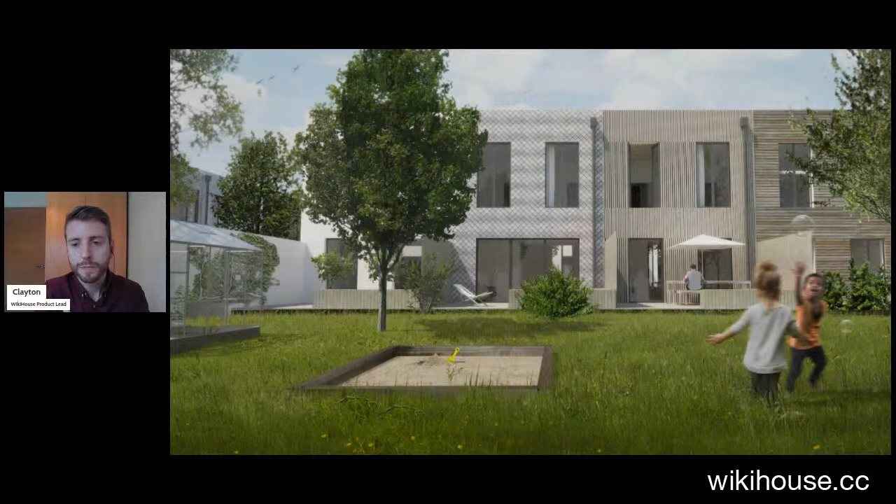If you've come to this through WikiHouse, you already know the context well - it's a construction system. That's one of the projects we do, working on how to make zero carbon construction more accessible and easier to do.

Some of the other projects we're dealing with look at design and procurement systems. This is part of the project we call BuildX, which looks at how to make design itself more accessible to people. The whole process from concept to finished building is really opaque for most people who aren't construction professionals, so we're trying to smooth that process and make it easier to understand using digital tools.

Then we're looking at the planning system, working with local councils to digitize their planning regulations and build interfaces for both planners writing the policies and end users who want to build something and need to know what they can build, what permissions they're allowed, and how to go through the process of applying for those permissions. That's ongoing and being tested with numerous councils.

One of the things we've started to get more interested in - though we've actually been doing this for years - is formalizing work on the property system through a project called Fairhold, which I'll touch on in this presentation.

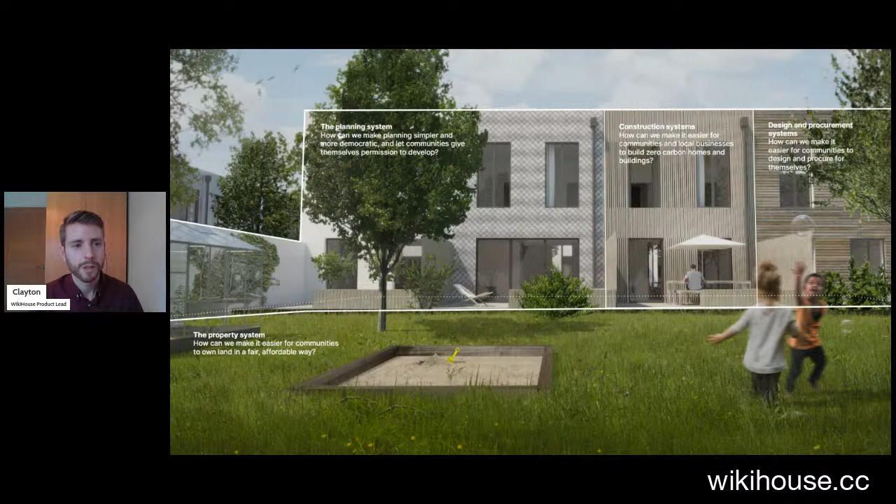I'm going to dive into the big picture here, which is the overarching question we all want to know: how exactly are we going to achieve zero carbon? It's talked about, but is there a plan? How are we going to get there? What needs to be done? For this talk, I'm going to focus on the context of the UK. Obviously this is a global issue and we all share the same atmosphere, so we need a global effort, but the UK is the case study we're most familiar with, and also one of the high carbon emitters per capita.

The big issues that come from this - of course we know the face of climate change and the climate emergency and the urgency of what we need to do - we also understand that behind all this, the problem is the systems we build our economy, lifestyle, and everything on, which are baking in these emissions and this trajectory. The only way we're going to change that is by looking at the models. I think one of the things I quite like about this is that there are a lot of invisible systems that we just take for granted.

At the same time, there's a lot that can be done in terms of the base level of understanding and accessibility to new technologies and new solutions, and the knowledge around that. One of the things that is changing is this push towards electrification of housing, and some policy is helping in this space.

The outlawing of gas boilers will push us more towards electrical heat pumps and MVHR ventilation systems, where you've got buildings built to a high level of air tightness. In terms of indoor air quality, comfort, and heat saving, heat pumps and MVHR make a lot of sense.

We're already seeing a large uptake in rooftop solar for domestic buildings, and hopefully that will increase. It also means switching appliances—anything burning fossil fuels, like gas stovetops, can be replaced with electrical systems like induction hobs, coupled with energy efficiency methods for the building fabric. This will make a big difference to operational carbon.

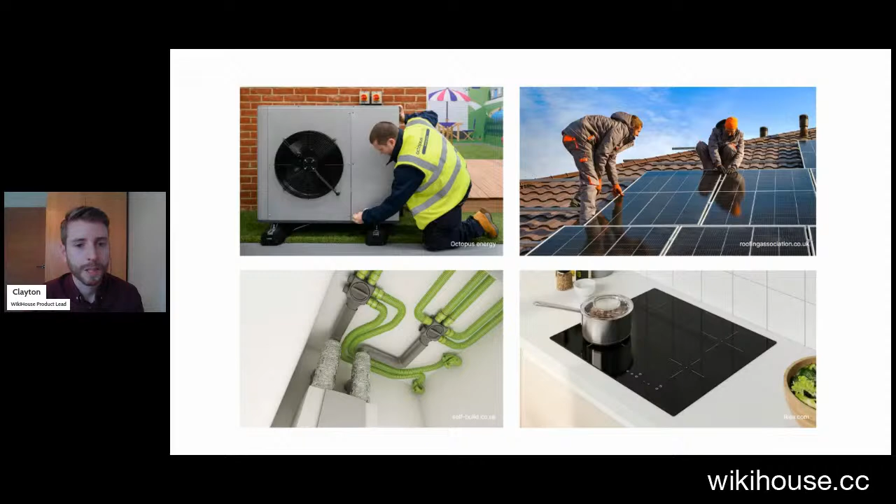This is one particular project worth taking a look at, which Dark Matter Labs and Civic Square collaborated on. It's about not just looking at retrofit in terms of the performance of the building itself in isolation, but looking at it as a neighborhood—both the retrofit of buildings, but also the public spaces, amenities, transportation, and livability for that neighborhood. So it goes deep on retrofit, and is definitely worth following in more detail.

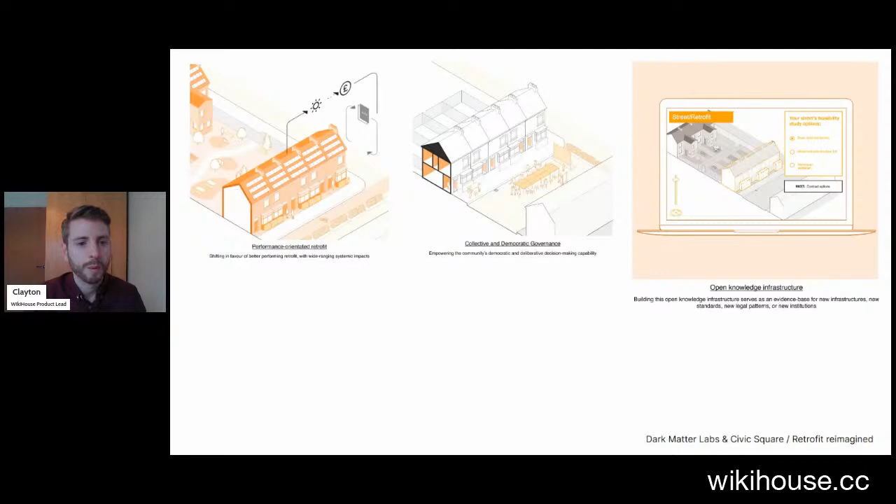Something else we're doing a lot of work on is new buildings. This is where we've come to with WikiHouse—we have a social obligation to build more housing. We can't just stop, and that's not just because of an increasing population, but because there's still a large unmet housing need in the UK, and an urgency to get people out of emergency accommodation into a home of their own, some stability.

Even the houses going up today or yesterday are going to have to be retrofitted 10, 20 years down the line, because they're just not going to meet the performance levels we're talking about, or they're going to be really costly to run. We're still continuing business as usual, at least in the mainstream, and there's a lot that has to change in the space.

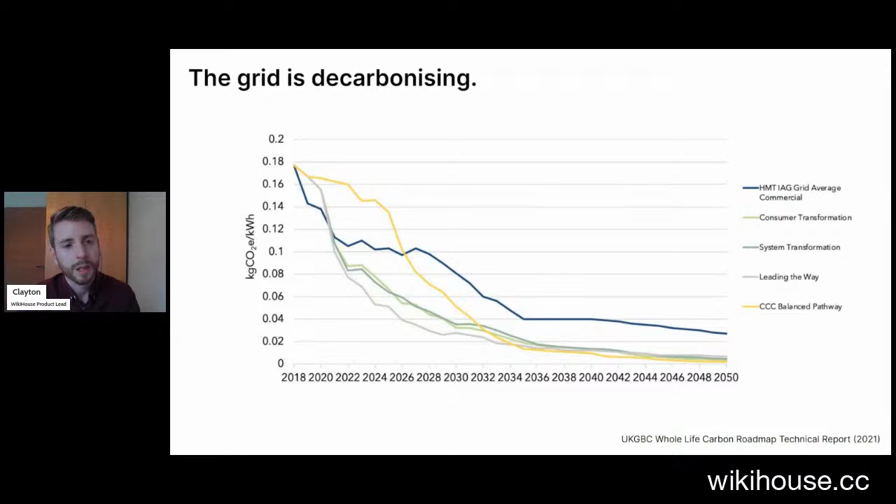That's both encouraging, but also it's a challenge for embodied emissions. And the way we currently build our homes, we in the UK have a large proportion which is focused on masonry and cementitious construction.

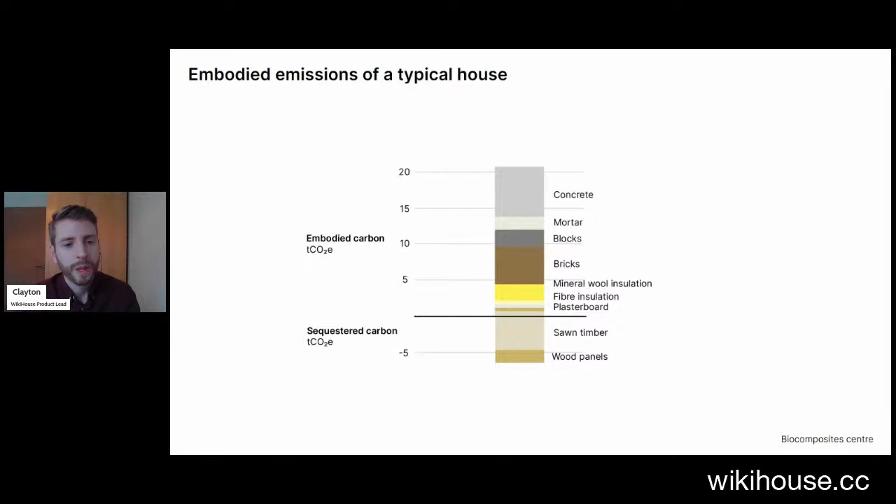So we've got a lot of concrete, mortar and brickwork in terms of the material profile, and very little that can be renewably grown, or that's biomass in terms of wood and timber. We need to flip that entirely, switching from carbon-emitting legacy masonry construction to something bio-based, renewable, and actually a carbon capture technology, provided you don't just burn it at the end of its life.

We've got this huge opportunity to use the materials that we need for construction of these homes to meet the critical housing need that we have as a carbon sink. We should have started on this yesterday, but this is really the big project of the next few decades.

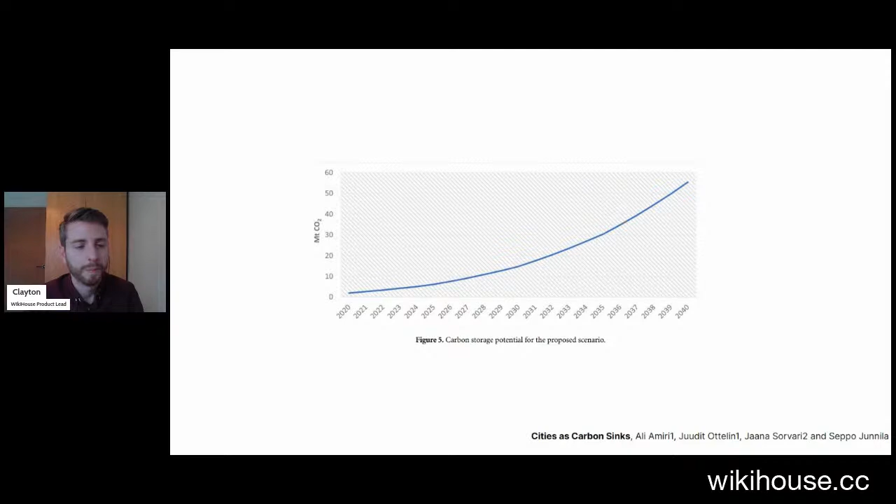So what's going to replace brick and cement? I think the answer is also really obvious, but in some ways there's so many challenges around this. A lot of it is cultural and political. Brick is still desired from a planning perspective, also from an architectural perspective, because it's a scale that we're used to seeing in the UK. So how do we bridge that into new materials that are also durable, hard wearing, and have the same sort of aesthetic quality - that's an interesting challenge.

Things like pretty plastic, which is made from recycled UPVC window frames and turned into tiles, is an interesting example. And then more and more, we just need to build with stuff that we can grow, and ideally grow locally, and then mill and turn into housing.

So how are we going to make this process the new normal? How do we go from bricks to something like WikiHouse? And that's our mission. For those who don't already know, we're trying to develop WikiHouse to be essentially the Lego system for zero carbon construction.

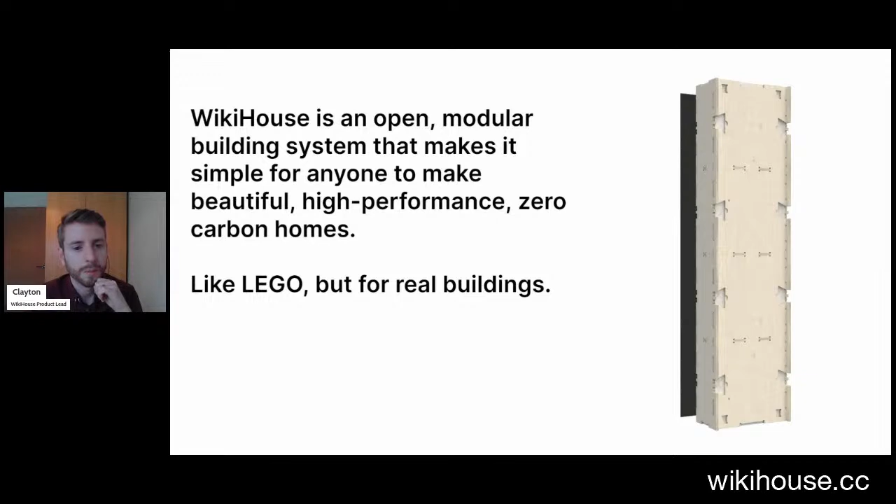It's supposed to be as easy to understand and put together. Anyone can do it. Anyone can understand how it works. There's a lot of engineering design knowledge baked into the system itself, but the blocks themselves are quite simple. And that also means that the process itself is really important.

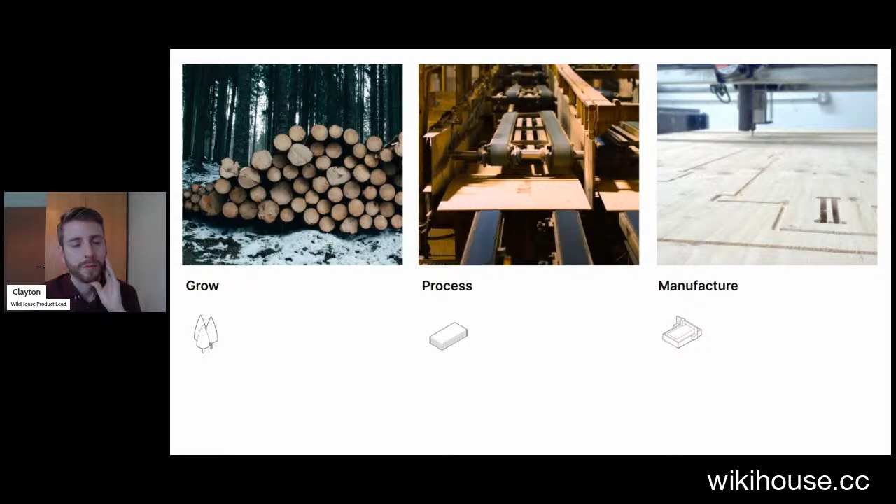So you can use locally grown forestry timber, processed ideally within the UK, and then manufactured ideally as close to site as possible. So your carbon footprint from cradle to gate is as short as possible.

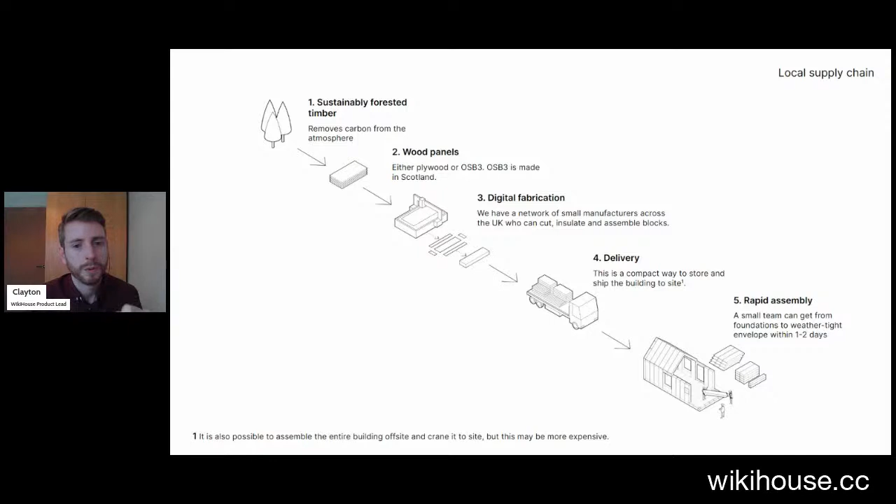And that's exactly the process we're trying to test through this model of small microfactories, where through the network that we already have, we can demonstrate there's a potential path to scale - a series of small factories networked together, working in competition but also collaboration, resilient and able to produce similar volumes collectively as having one large central multi-million-pound factory that takes years to set up and is really prone to downturns and changes in the housing market.

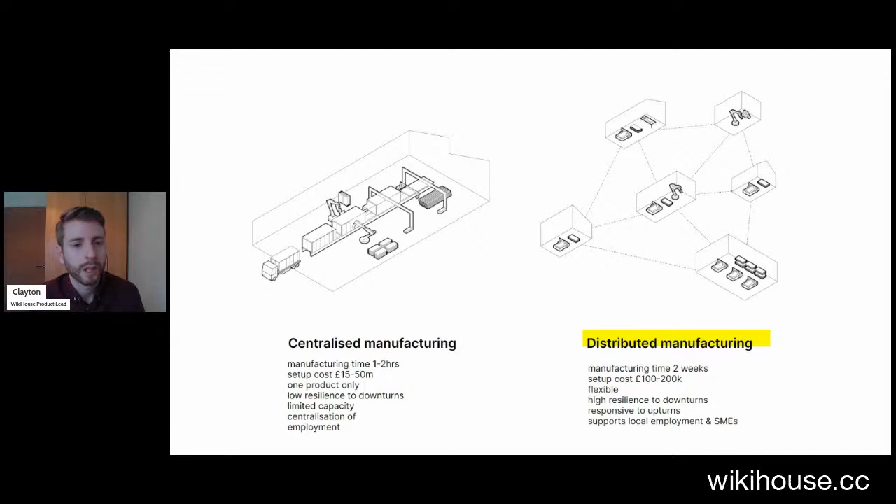And the big opportunity that lightweight timber construction has is that you can look at different foundation options. So something we're very passionate about is switching to concrete-free foundations, where you can use things like ground screws or timber piles to be the base frame, base foundations for your building to sit on.

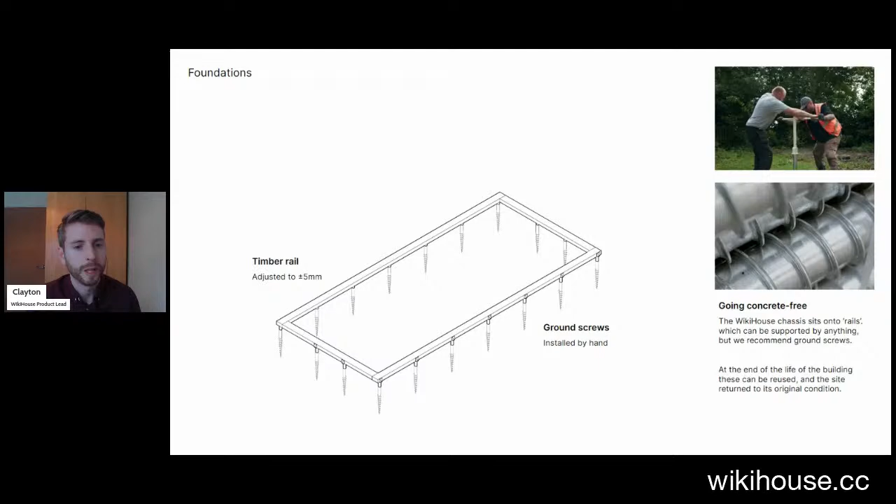The nice thing about these, they can be removed and reused, hopefully infinitely, on other projects over their lifetime. So nothing is single use, or very little.

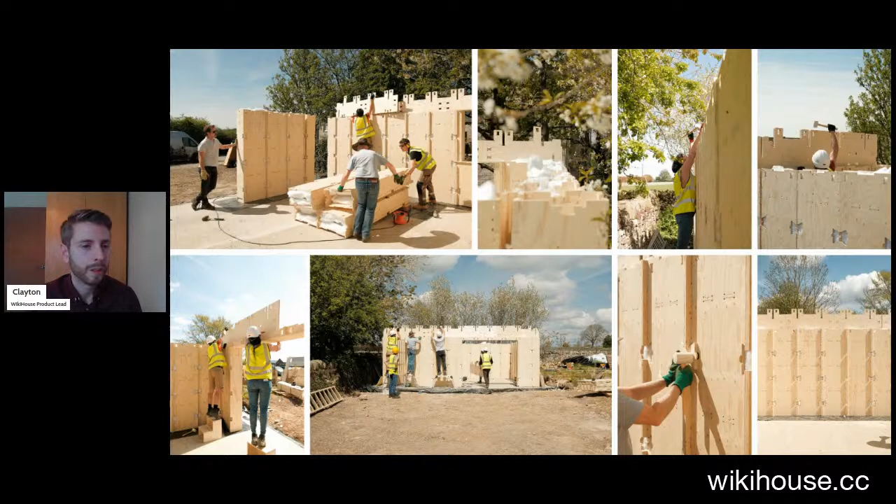And then just showing the build process, which most of you will be familiar with, in terms of the assembly of these blocks - everything can be both assembled but also disassembled in the same way. And that's really important.

So a couple of years ago, we were fortunate to do some research in depth with Leeds Beckett University, who looked at the life cycle carbon analysis of a typical WikiHouse two-story project using Skylark, and then did some lifetime modeling in terms of embodied emissions and operational emissions over its lifetime.

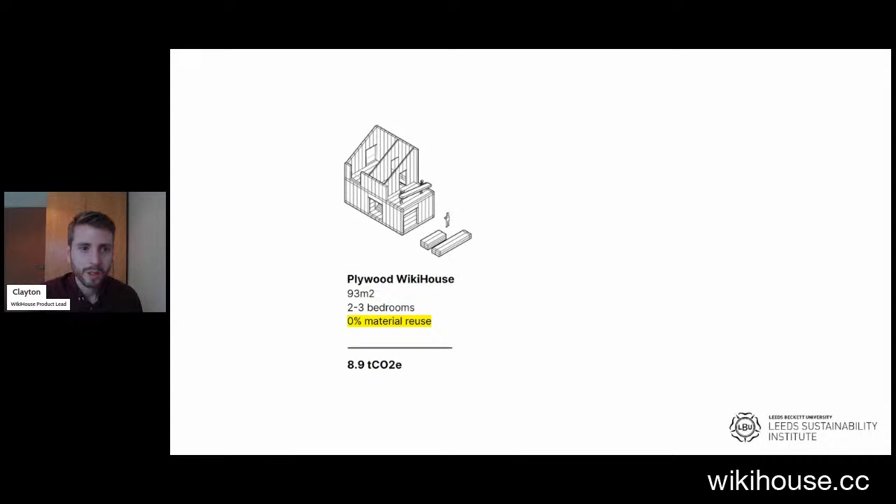So there's some interesting questions around material reuse. I did some comparisons using data that Leeds Beckett put together comparing brick and block versus plywood. If we didn't reuse any materials at all, WikiHouse would be around 9 tons, but compared to brick and block, it's not even close.

But if you do a comparison between plywood with say 40% reuse, you get to the minimum net zero figure we're looking for. That's assuming even some material reuse in the brick and block option, maybe timber roof trusses, timber beams, window frames, and a few other bits of material.

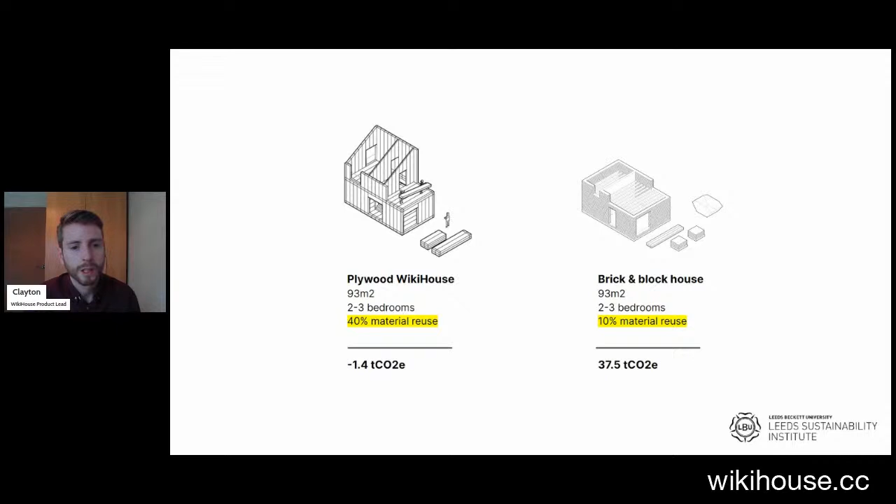And that difference, the 39 tons, is equivalent to driving a petrol car around the world 7 times. This is just for a single house, so you can start to see the impact even at a small level by switching to low carbon, carbon negative building systems in comparison to masonry.

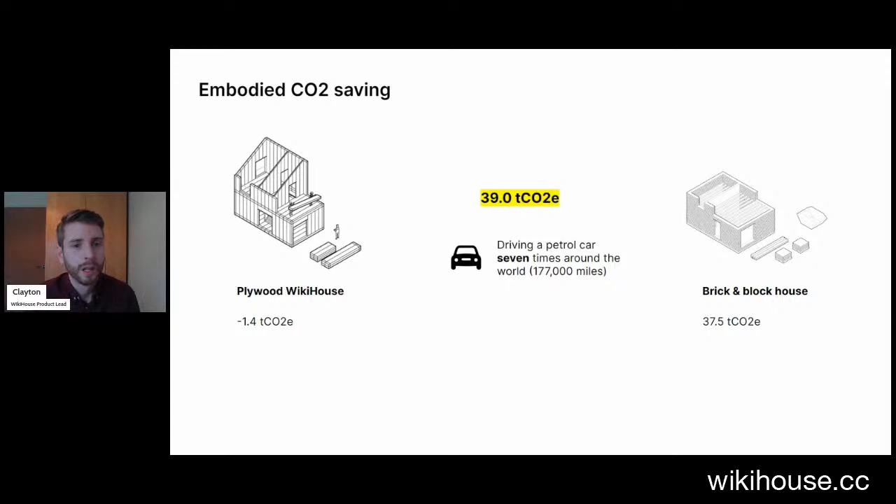One of the really interesting recent studies is the opportunity with OSB versus ply. That's something we're testing at the moment, and I'm sure we'll have more to report in the coming months. One immediate difference is that, at least for the UK context, OSB - or the timber for it - can be grown locally here and also locally milled.

That difference in local transportation, from the factory through, is about 155 to 160 kgs of CO2, and over the amount of material we're using, that's equivalent to flying a 747 from Heathrow to Edinburgh per house. So it's definitely measurable and probably quite desirable that we crack the OSB option.

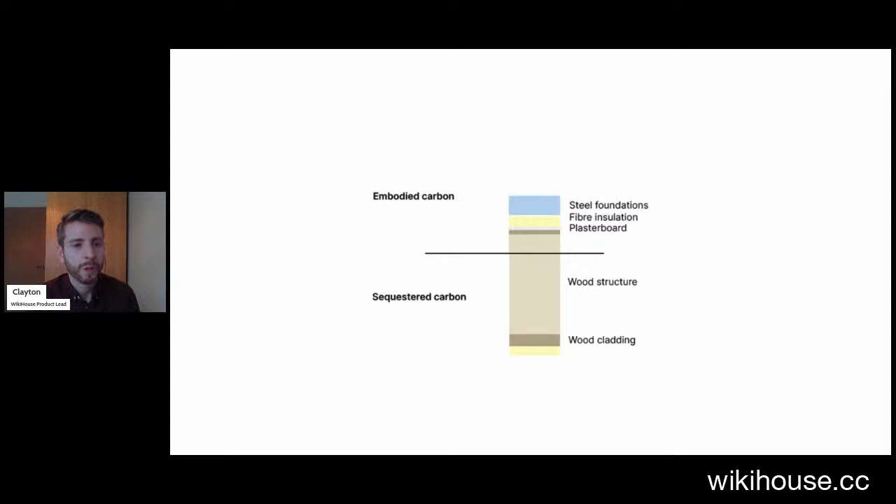That means, in comparison to the diagram earlier with masonry construction, we're pushing most of the material into sequestering carbon, and what's left is a few other elements like insulation, foundations, and plasterboard, which has a carbon cost to make, but maybe can be reused - we need to find processes for doing that.

So if we look at WikiHouse in this context, it's great, and we've done a lot of these one-off projects, but how do you really scale it? We need to scale processes like this - it doesn't have to be WikiHouse exactly, but other types of bio-based construction using local materials and local manufacturing.

One way is to have a large open network of CNC machine shops, so we can simultaneously produce all the parts we need for houses across the network. There are supply chain and overhead challenges in managing this process, but the opportunities are huge because a lot of these workshops already have capacity, and the machinery and tools are there. What's needed is the infrastructure to link them all together.

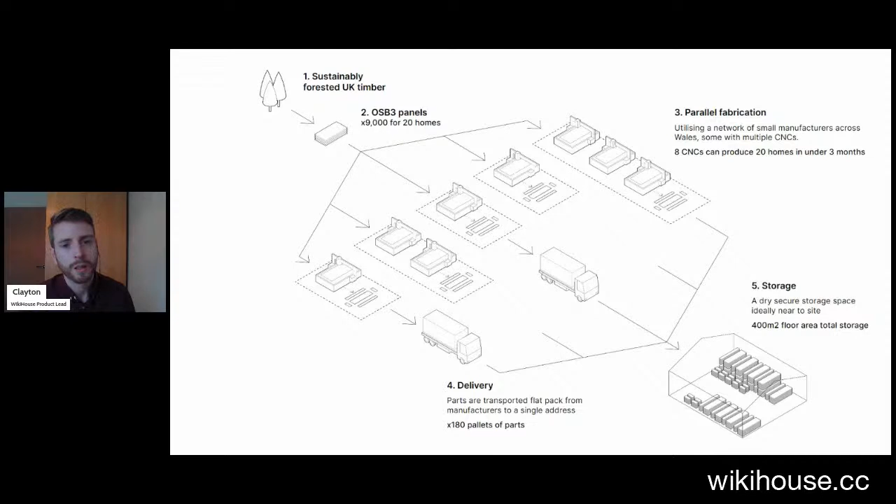Running some numbers on this was quite interesting. For the equivalent of building 20 three-bed homes, there's about 9,000 sheets of OSB, and it basically comes down to time. If you had a tight deadline for a large site, in under 3 months with 8 CNC machines working across different sites, you could produce 20 homes, and those parts could all come together and be stored flat pack in a central location.

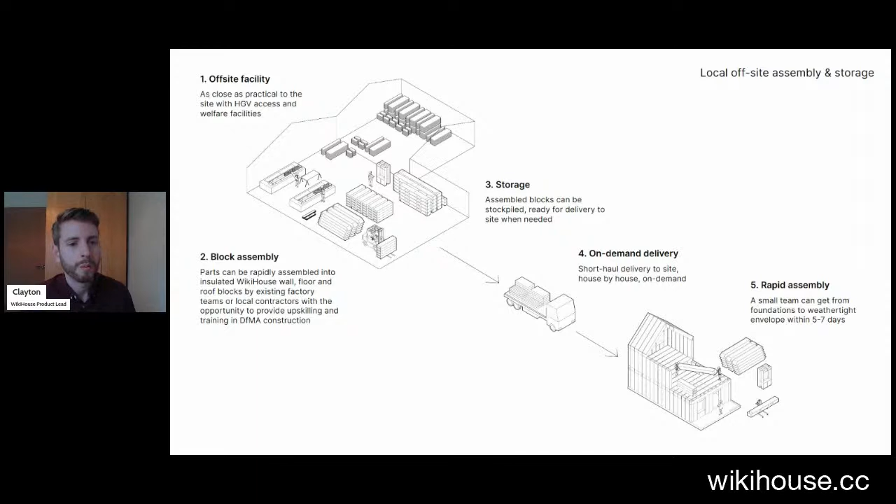The next evolution of that is essentially a large assembly warehouse, which could be set up as a flying factory - it doesn't have to exist permanently. That can be quite near the site or even on site for a larger scheme. This is essentially an assembly workshop where blocks are put together, insulated, and ready to deliver just in time for constructing each of the units. Working out the space requirements for that has been quite an interesting exercise.

So the big picture vision: if we were to achieve something like 50,000 WikiHouses per year, that would make quite a large dent in the housing need requirements we have. It's equivalent to about 4.6 million square meters, which is roughly the total floor area of all detached homes built in the UK a few years ago, just as a reference.

But it would take about 28 million sheets of timber, which is quite a lot as you can appreciate - that's 22% of all European OSB production. A lot, but not impossible. One of the things needed is to scale not just the manufacturing capabilities of the building systems, but also the milling capabilities, sawmills, and forestry to deliver that.

And doing that with 7,000 CNC machines is maybe sort of dreaming, but interesting to dream.

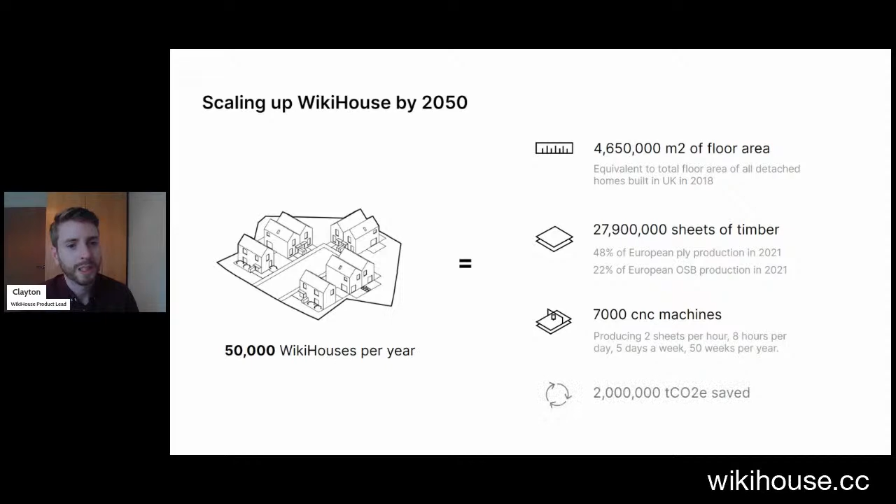If we're going to do this, we need to do it in a way where we're not going to screw over everything that we had. We need to make sure that the forestry we're growing to produce these biomaterials is done in a regenerative way, and that it's not all about dominating the landscape with a monoculture of single plantations. There's a lot of work being done on this by people much smarter than myself around management of these forestry systems.

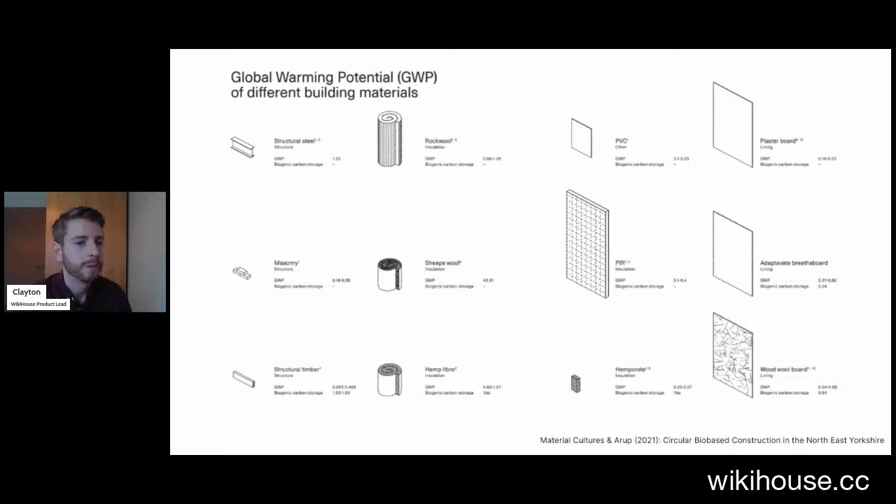There's an interesting case study you should check out by Material Cultures and Arup, looking at circular construction within the context of northeastern Yorkshire. They did comparisons between commonly used building materials and bio-based materials for structure, lining, and insulation that could be locally grown, farmed, milled and produced, and what would be the carbon impact of that. It's worth looking at, and shows interesting opportunities for the future, moving away from large centralized supply chains for raw materials into something more naturally based and locally grown.

There's a project happening at the moment which we've had some involvement in from a distance, with Wessex Community Assets, where they're looking at how they can combine digital fabrication with local production of materials, with the output being community housing that could be scaled. They're doing a lot of work with local hemp production to make hempcrete and hemp-based insulation.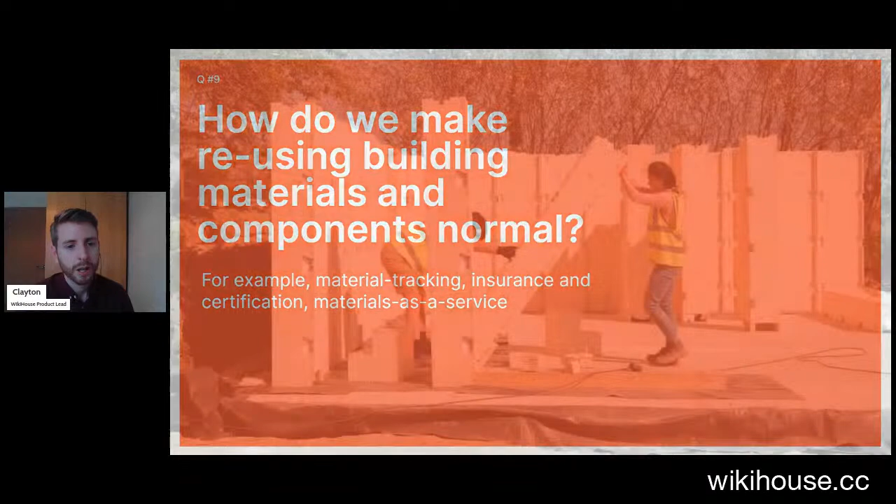It's all good if we can make the materials, but we also need to make sure they can be reused, that we can extend their life as long as possible, and find second lives for them beyond that. For WikiHouse, that could mean something like a parts tracking system where each block can be referenced to an online database, so we know the origin of its materials, who manufactured it, and its end-of-life situation. This means we've got a complete understanding of the impact this is having, and whether and how those materials get disposed of.

Looking at a bit more detail, with WikiHouse blocks we can pretty much solve a circular structural system. There will be waste and offcuts from manufacturing, like sawdust and chippings, which obviously can't be reused in housing, but they could go into other products like chipboard or other panel products, and back to the sawmills. For the blocks themselves, it's about extending that life.

When you look at some of the other materials, insulation has a large degree of reuse, but the big challenge is things like seals and tapes, which are small in terms of volume and weight, but very difficult to recycle.

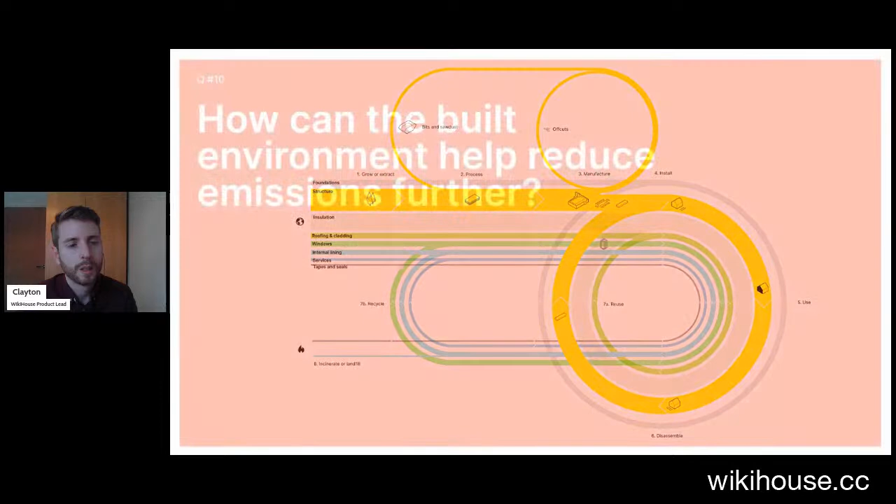There are a few other steps the built environment can take that have a wide impact beyond just direct emissions. One is transportation and land use. How we plan our neighborhoods has a big bearing on the emissions profile of those neighborhoods over their lifetime. We need to move away from car dependency into closer-knit neighborhoods with a range of different transportation options, encouraging walking and cycling, rather than spreading everything out and relying on single-passenger vehicles.

What we know is that in terms of the total net worth of all assets, land has a huge impact, as well as other things like buildings and infrastructure. Very little of our asset worth in the UK is tied into IP and other products—a lot, very much all of it, is housing and buildings in some way. Through research on the Fairhold project, it's fascinating to note the values we talk about in real estate versus other sectors where we place so much emphasis on access, rights and monopolies. We look so much into data and business, but the real estate market is sometimes undercover in terms of understanding its impact.

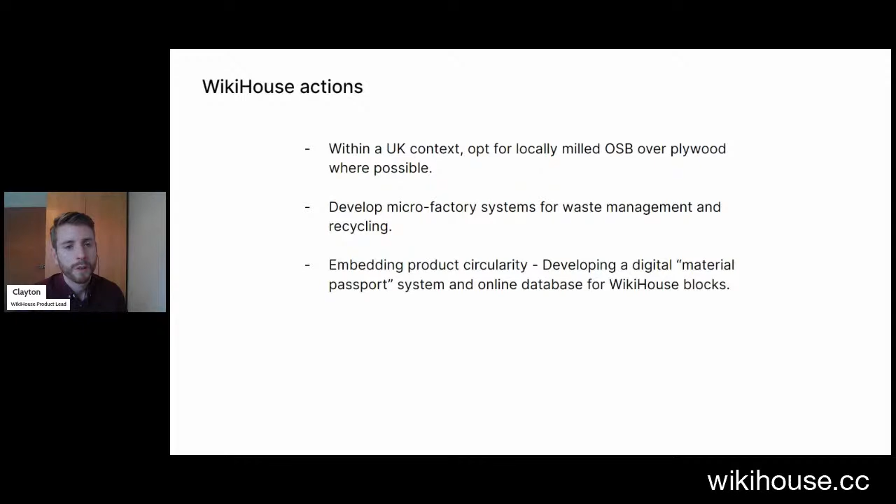More immediately for WikiHouse, our next actions are to look at OSB over plywood where possible in the UK, to look at the microfactory model and the systems for management of waste within that, as well as quality control and durability, and then looking at product circularity around a material passport or database for WikiHouse blocks so they can be referenced, looked up and traced.

And then being better at quantifying the benefits of this approach versus others. A lot of that comes down to understanding the impacts we're having or can have, particularly with embodied carbon and biomaterials—we often talk about this as an upfront cost premium. But what does that play out as over the lifetime? If you don't have to retrofit it later, or reinvest in better efficiency later on because it was already built that way to start with, I think that has a big impact to play, and it's something that's not really understood very well.

And then there are opportunities to pilot and test this, and go deeper on things like biomaterials all the way through—not just talking about the structure, but other things like linings, claddings and energy systems.

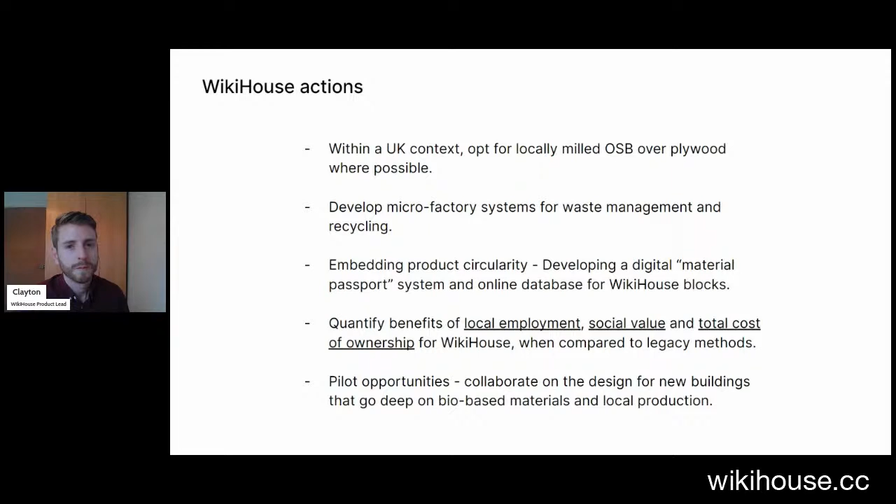For further reading, if you're interested in this stuff, there's a lot of great information out there, particularly from LETI, who are doing a huge amount of policy work on this, UK Green Building Council, and BE-ST, based in Glasgow, who are a living lab for testing and running this kind of innovation. There's also a good podcast to listen to if you're interested in what's happening in the space.

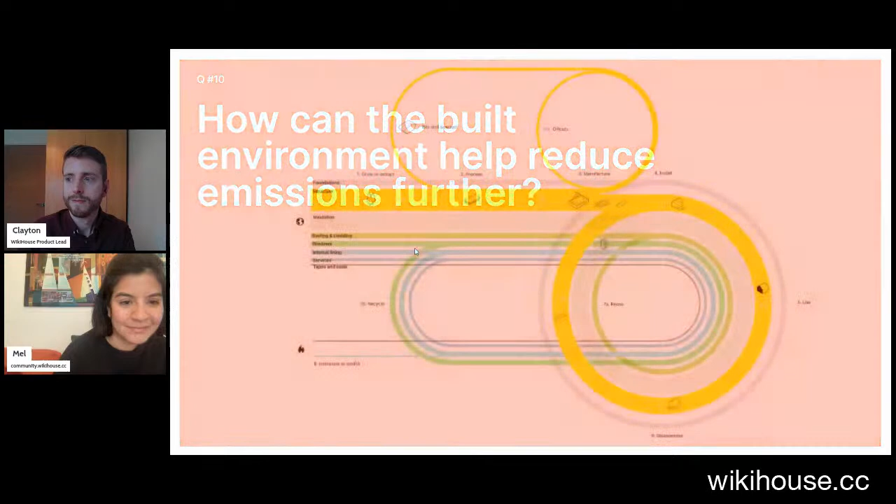That's the one - can you tell us a little bit more about that? I think it'll be easiest if I share this diagram afterwards. We're just looking at what are the main materials within the WikiHouse structure, proportionally, and then things like insulation and foundations - if we can use something like ground screws, which can be completely taken out and reused on other projects.

Things like cladding - if dry fix is the approach here for cladding and linings - that's stuff that can be demounted and taken away, rather than using wet trades where things get broken and have to be scrapped. So everything mostly follows a cycle of recycling, if not reusing. But there are lots of questions here, and it would be nice to get to the point where we can do a pilot circular house and test this, to say everything in here can be completely demounted, taken away, reused, and built again, and prove that as an example.

Yeah, wouldn't that be amazing if we could do that? Brilliant. So you're happy to share that.